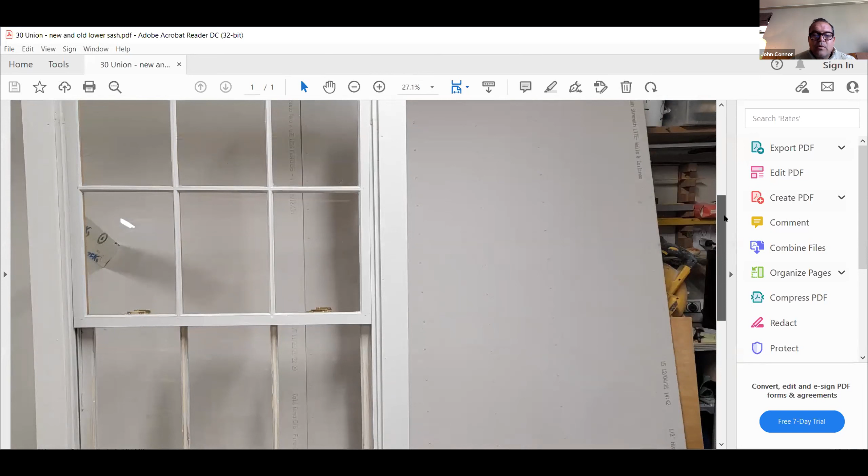You'll see the windows that I purchased, and I've actually built a sample. We took apart one of the entire windows, kept the profile of the frame, kept the upper sash, but to gain 6 more inches so we get them longer. The windows we replaced were 69. The opening was 76. So what we did is custom make. My guys in Long Island made an elongated lower sash by 6 inches.

So you'll see in the photo that's on the screen right now, the one from Brosco on the right that was poorly painted. Took that out and then exactly copied all of the detailing with just a longer sash by 6 more inches, meaning that each pane of glass is approximately 3 inches longer than before. There's also a rendering, Victoria, if you scroll a bit further down or click next.

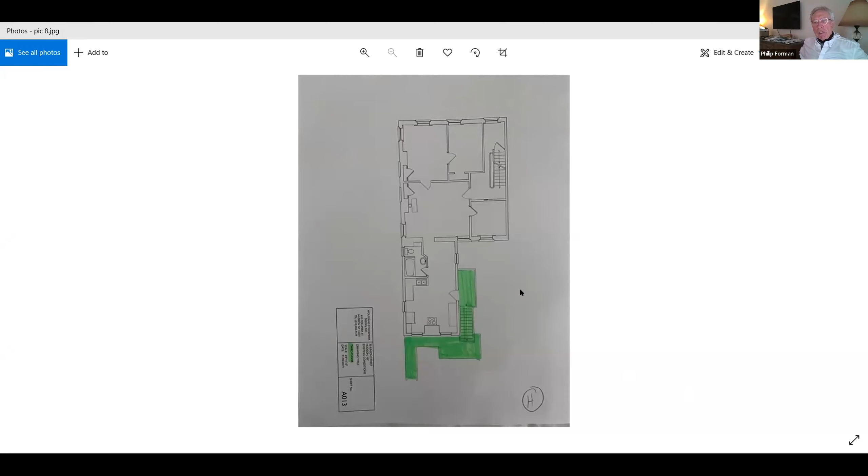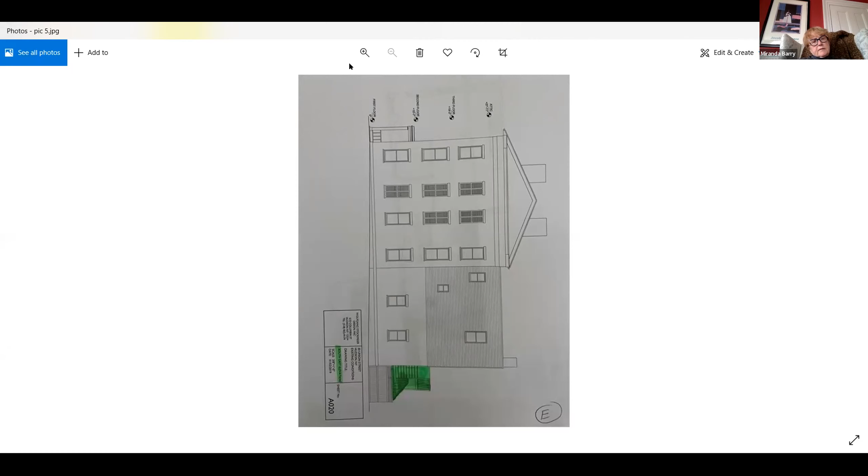And could we take a look at the new egress structure, John? It's in plan for what was there in '18. It's highlighted in the green; there's I think two or three renderings from the architect that show it. Yeah, that's the side view. Can we rotate the image possibly? It's at the top there. I'm not understanding what the egress structure is. It was a composite wood, I try not to use the word fire escape, but an egress structure. That's on the back of the house?

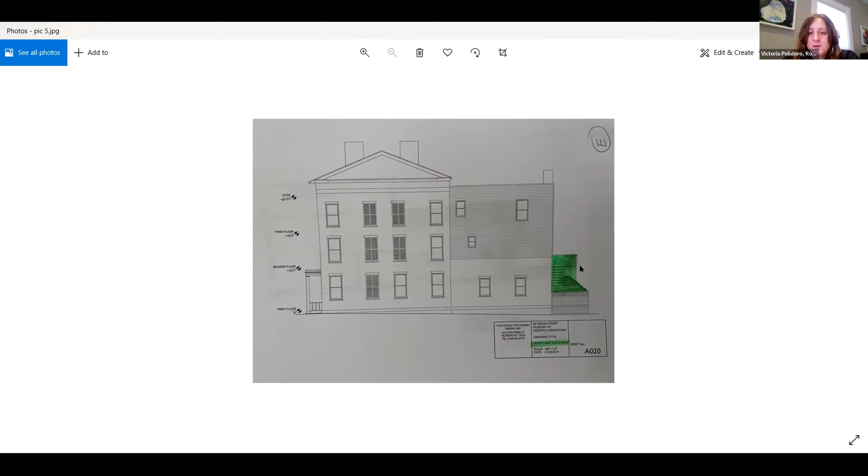These are three floor-through units, so it's to get an additional egress from unit 3 and unit 2. Okay, so that's a safety issue, to code and whatnot, but it's to replace, yes. But we can't see what it looks like. Can we blow it up a little bit? John, did you have pictures or renderings? No, I have this as-built from the architect, which I just highlighted in green. You mean it's built already? It was built, but it fell off the back of the building. So this was the as-built, and it was taken off because it was a hazard.

Is this a replacement in kind? Yes, thank you. And what is it made of? Instead of the chemically treated wood, it'll be done in wood as well, but in the more environmentally sensitive, I'm sorry, I'm forgetting the terminology. Not pressure treated? It's pressure treated, but not that green copper arsenic one. The more toxic one, I'm not using that one, obviously. Okay.

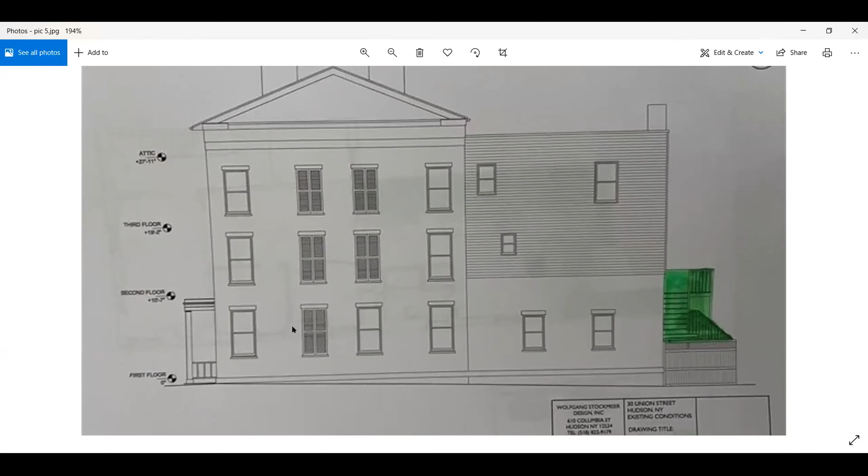But we don't have any details to show what this is going to look like. Well, question for Craig, did you determine this was a replacement in kind? Is this part of the C of A application? It's part of the C of A application. I don't know if it's a replacement in like or in kind. I know they took off the old one and replaced it with a newer structure, which is now compliant, but we do need a detail of the material. It hasn't been built. The platform has not been built to date.

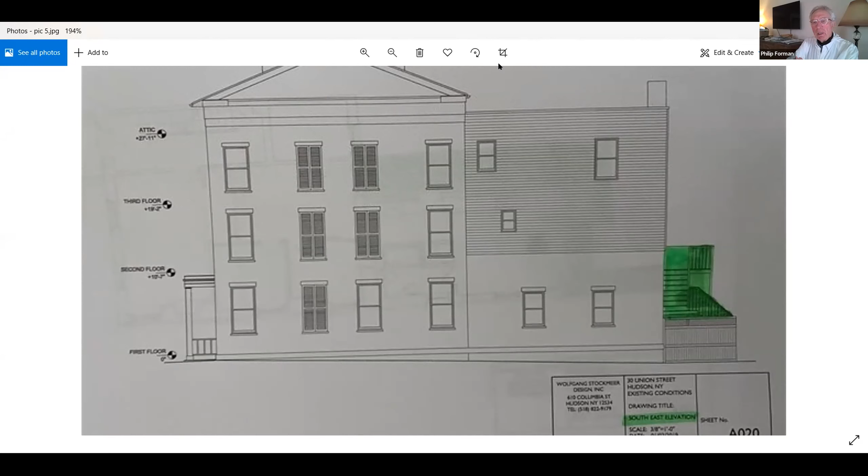Okay, so what was there is no longer there. We don't even know what was there. So in order to provide proof of like for like, we need to know what was there first before it's removed. Right. They gotta give us a detail of what is going back there, the material, the size, the construction, how wide the balusters are. John, we're gonna need to take the egress structure off at this time, that's fine, and have you come back with more detail. Great. Sorry about that.

Do you have any pictures of what it looked like before you took it down? I do. I think that would be important to determine whether it's like for like or not. Bring that with you. Miranda, I'm asking for another application on this, stripping away the egress structure. From what I can remember, it was an old rotted wood structure back there, in an unsafe condition. So I think they're replacing it with wood, but the whole design of the egress system is going to be different than what was there. So the design, the material, everything comes into play as a new structure being built onto the exterior.

Okay, John, as you know, if it was a true like for like, that would not necessarily go to the commission. You should work with Craig as you put together your plans for the egress. I'll do that. Thank you very much. I think our motion still stands on the application, but it is about the windows and the cladding being removed. We already declared that complete. Let me just ask, excuse me, Phil, but Paul, did you have some comment to make? I thought I heard you start to make a comment.

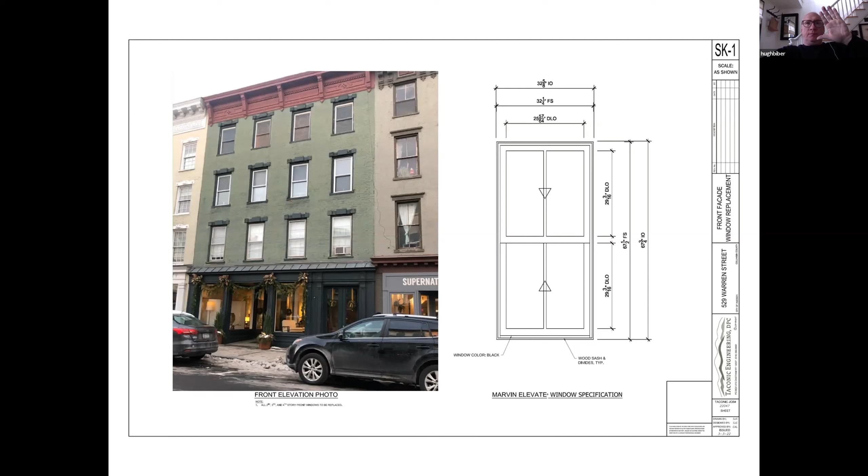Aye. Motion to waive a public hearing and request the city attorney prepare a C of A. I'll make that motion, thank you Paul. Jeremy, second. All in favor? Aye, aye. Any opposed? None. Approved, we go forward.

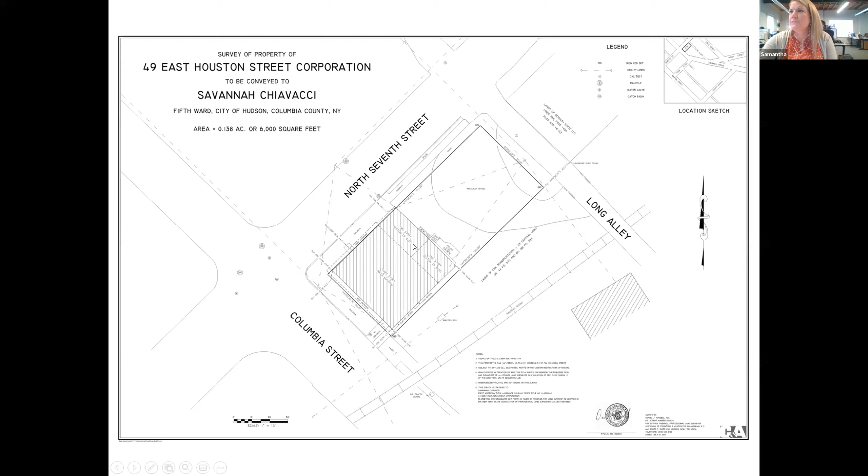So this is the survey and existing condition of the building at Columbia, on the corner of Columbia Street and North 7th Street. It's currently vacant and in the past has been used for business use and residential. The front portion is a 3-story brick building, and in the rear half is 2-story brick and a 1-story building.

So the owner proposes 2 retail spaces and a space that could potentially be used for a restaurant, and then the 2nd and 3rd floor as residential.

So the owner is proposing to extend that 2nd floor brick portion in the rear across the entire building, and then adding a 1-story addition to the back with a prefab metal staircase and a fenced-in courtyard.

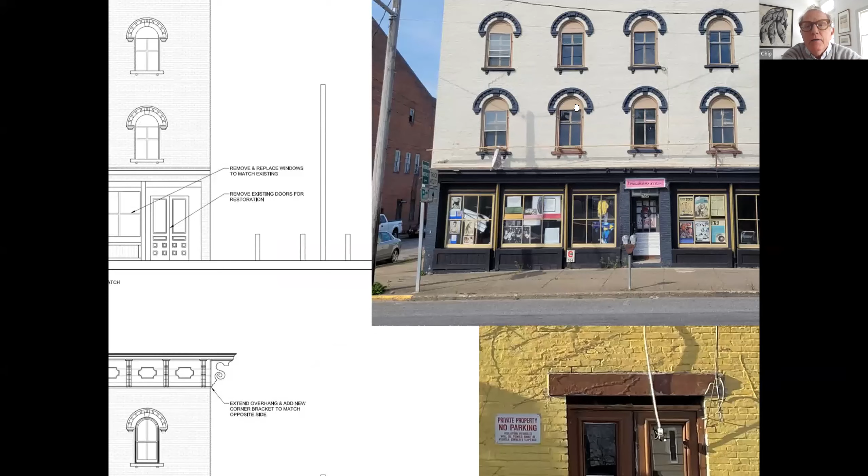Could you show an exterior view of those windows again for the commission? Do you have a zoomed-in detailed photograph of that? Yeah, if you zoom in, that's great. Going a little further. Unfortunately, that's as far as I can zoom in, but I can certainly send you a closer up photo.

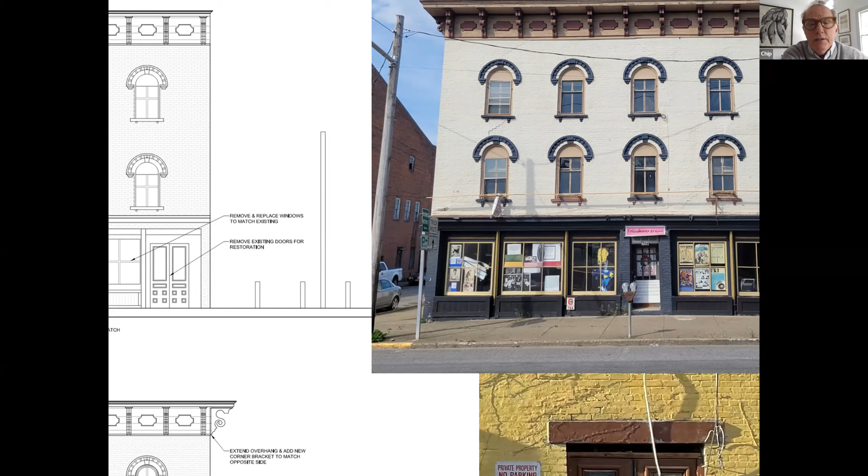For the commission, the arches of these upper story windows are very interesting—elaborately detailed corbelled brick that forms the arch shape. It's quite a handsome building, and there's a lot of original material that's quite attractive. In this photograph we can see, to Paul's point, that many of these original sash are in fact in place, obviously in need of repair and restoration.

And just to elaborate on that, Chip, Samantha and Kylie—if there was a way those windows could be further evaluated to see if they could be restored instead of replaced, I think that would be a great idea. Okay, we can look into that.

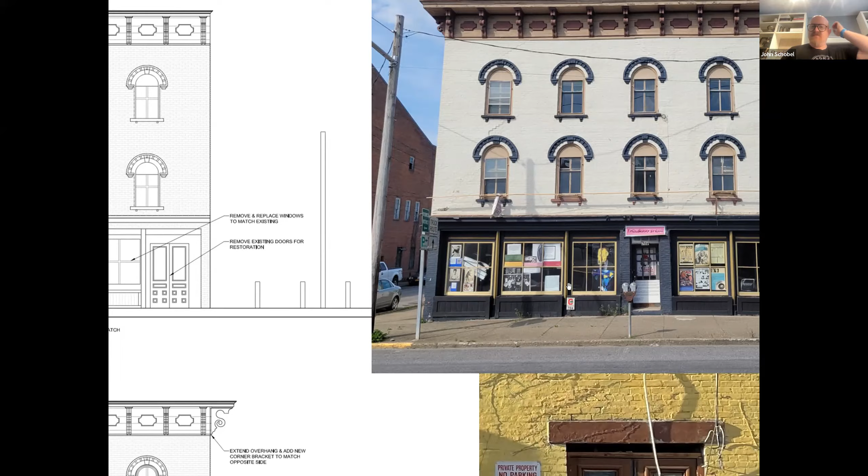Does the commission have any opinion on the door, the new door that seems to be the most radical change proposed? I think it would be interesting to know—the storefront that's there is clearly not original to this building, and the replacement infill sash that are there, I think, are not original either.

Can you zoom in on that storefront as you had before? There are these fluted iron columns that are painted yellow here. And certainly the planters should be removed. The condition of that storefront is super questionable—it's been really beat up.

I don't doubt there was originally some different type of door and window configuration for the storefront. It'd be super useful if we had an early photograph that might reveal this configuration. My personal opinion is that the existing storefront is not original and probably not really worth restoring. So you suggest you would replace in kind the storefront windows?

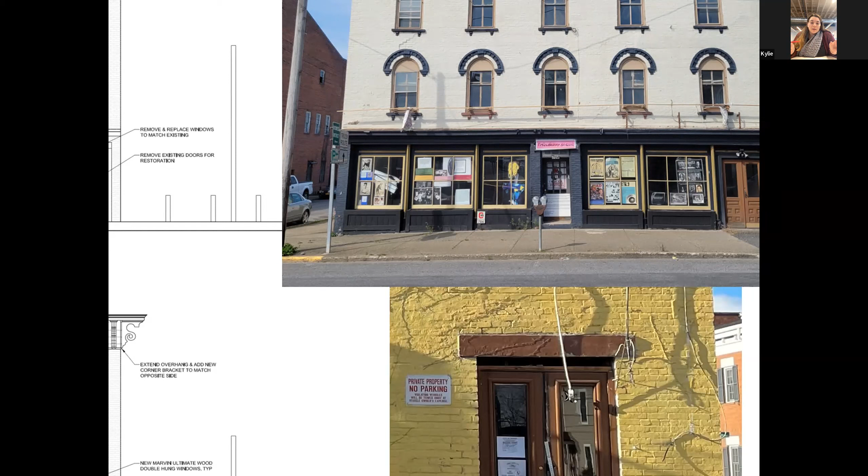We do have some information regarding that. Those brick piers in the center that are on either side of that door, we believe those are original. Same with the brick piers on the edges. So the inset that you see, which is in front of the existing storefront windows, in all of the historical images that we have, that also appears to be original. But you are correct when you said that the configuration that exists now for those storefront windows is probably not original. That door on the right-hand side is probably original, but the rest of the windows and the doors may not be. There are multiple representations that have conflicting information.

And do you believe that the fluted cast iron steel columns, that those are original to the construction? Yes, because they seem to support those large masonry openings that are cut in so that you can see that inset. Do you have historic photographs that show some of the original storefront? I have them. Give me 1 second. Maybe it would be best to bring them back at another time because I have to find them and pull them up. We can gather them up and submit.

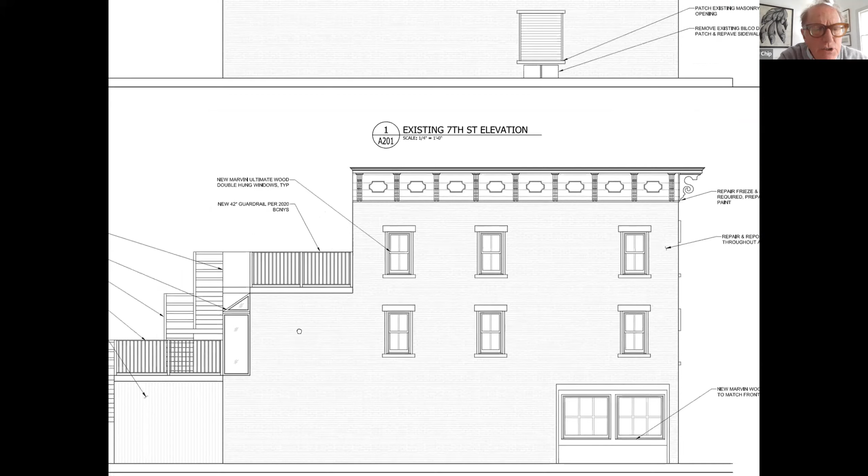And Kylie? The sloped roof, yes, there is sloped glass on top of there. I see. Would you zoom in to that so the commission can see that? There we go. Right, so put your cursor on the sloped glass that's there. That sloped glass is going across the back of the building. If you could now show the commission the rear elevation. So that's the sloped glass coming across there. Yes. Thanks for pointing that out, Chip. I couldn't deduce it from that 2D rendering.

Yeah, so it's also a little hard to understand exactly. If you were to put your cursor in between those two pieces of greenhouse glass where you have stairs, that wall right there, hold it right there. That wall plane that you're showing right there is essentially the background, behind the sloped glazing of the greenhouse. Correct? No.

So the sloped glazing starts at the existing brick and then is cut into the building behind 3 feet. So those windows would be installed in the existing plane, and then you'd be cutting out 3 feet so that you could get that sloped plane in there. I understand that. So take your cursor and zoom into the sloped glazing, if you would. You see the sloped glazing and you're indicating the triangular piece of glass, right? Then there's a triangular piece above that that finishes out that rectangle. What is that material?

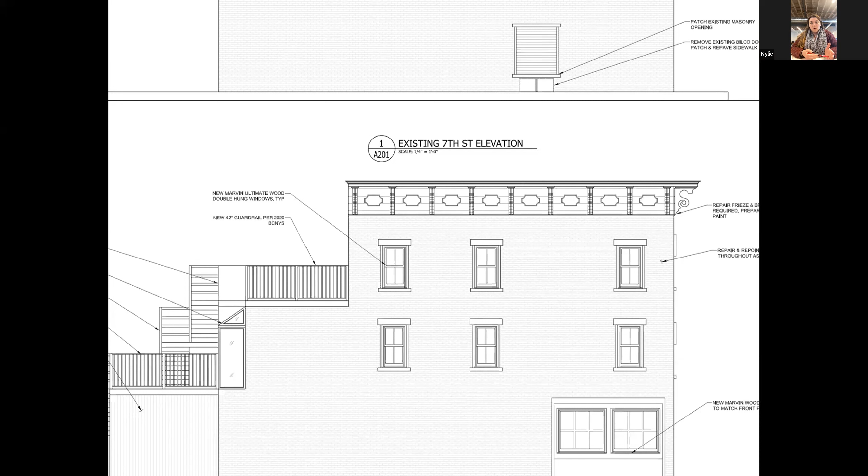Can you show us the rear elevation again? I think Chip is thinking that the windows go all the way across, but I think there's a section in the center where the stairs are that does not have those windows. Correct. Yeah, and so my question is that the plane of the wall, move your cursor a little bit to the left of those, right there, that wall plane is back at the top of the sloped glazing. Correct?

It's my understanding that this wall here and the brick wall is still the existing brick wall. Well, if that's the case, then your slope glazing isn't going back, it doesn't make any sense. Your slope, you cut it out on the side, but you haven't cut it out on the back.

Yeah, my understanding from what you said earlier is that it's 3 feet in and that you have these two planes. Where the brick is in this rendering is 3 feet back from where it is today. That 3 feet forward is where you have the glazing. And then you're gonna have some kind of turn or corner, which I think is what you're talking about, Chip, where the windows end and the wall continues.

Yeah. I mean, the bottom line is that I think you kind of have an Escher drawing here that doesn't really work in 3D. You've got a side elevation that doesn't really work volumetrically with the rear elevation. So I think the whole issue of the slope glazing is an integral part of your proposal here, and it's rather hard to understand what it really means.

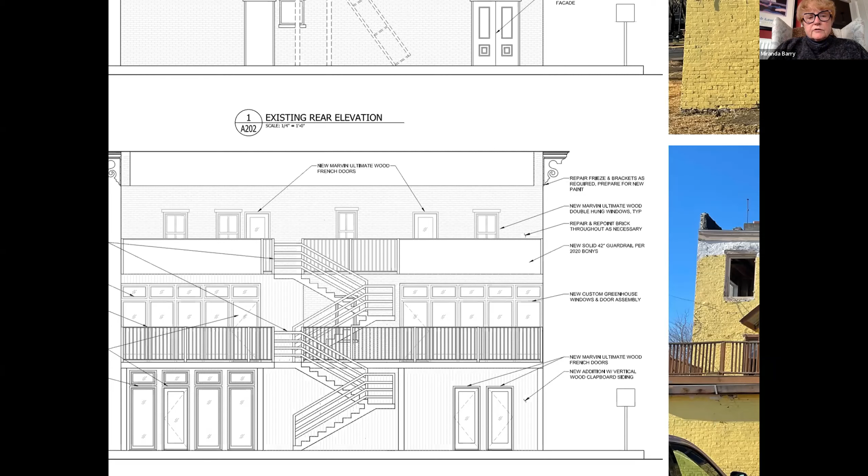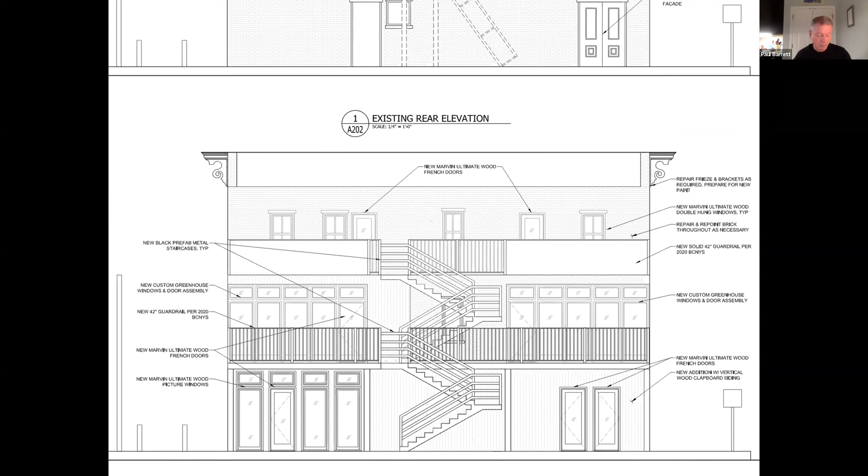Yeah, the question is, looking at the greenhouse windows that are shown on this elevation, the transoms across the top of the windows, are they flush with the brick wall, or do they have a sloped top that sticks out 3 feet? Or 2 feet or 1 foot? Nothing sticks out. Let me go to the side. Yeah, see what Chip is pointing out. There you go.

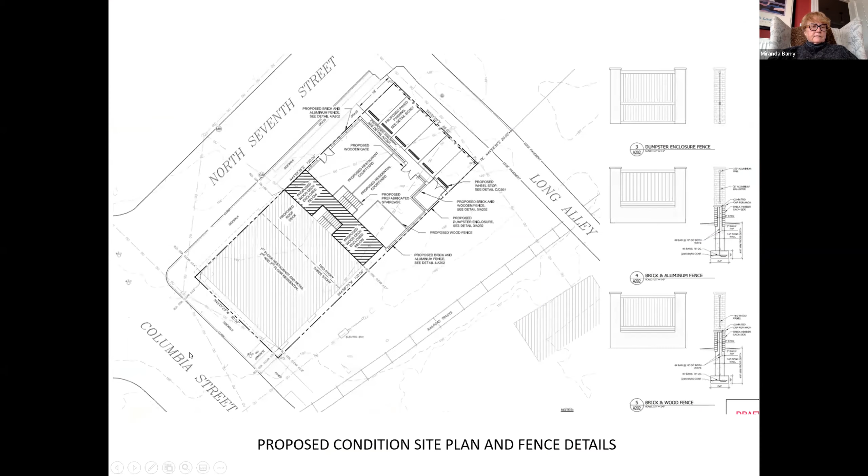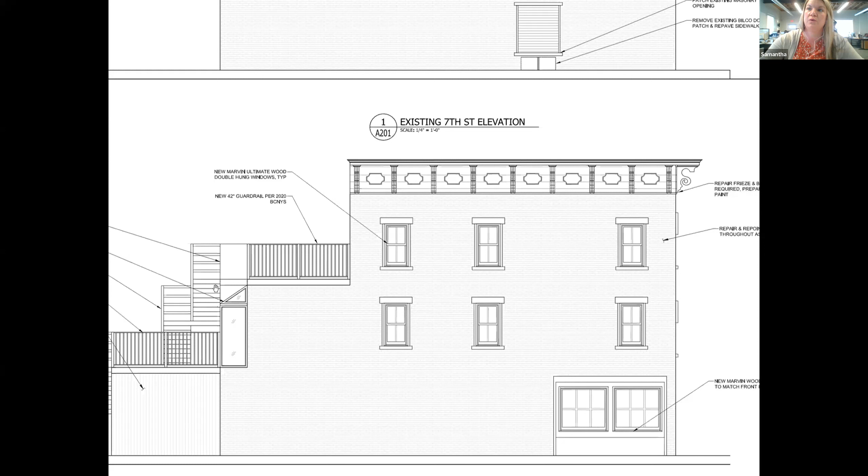So here you're saying you're taking 3 feet out of the existing wall. Right, so this is the existing up here, it goes all the way down and it's in line with the existing, so the existing rear wall is remaining, except for the portion where the greenhouse windows and doors are, where it would be set in. It's also not clear what's landing on top of all this, how that's working, but that's a separate question.

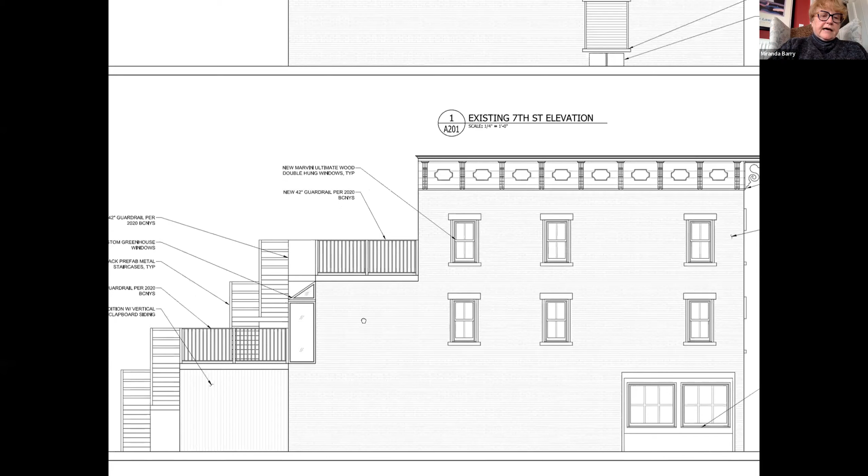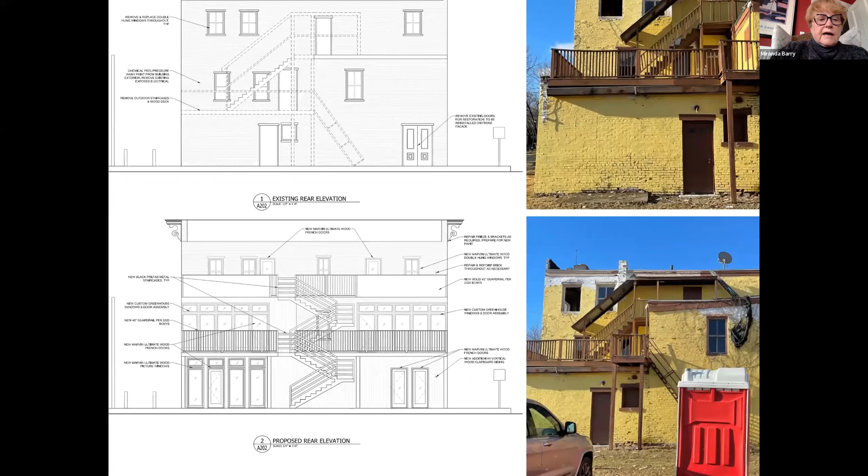So if we imagine this triangle, you're saying that on the rear elevation, the triangle goes all the way across until the center section where the brick is remaining at the same plane that it is now. So right above where your cursor is right now, on that window that's closest to the wall, there's going to be a slanted plane coming out, and the bottom windows, the large windows, are flush with the brick.

Is that right? Yes. So there's a tilted, and then what about above those windows? Is that at the plane of the existing wall? So the whole slant is underneath the existing wall, or what is that? Kylie, do you know that question? Sorry, can you repeat that?

So looking at the horizontal plane above the greenhouse windows, that section there, is that flush with the existing brick wall? And if so, then it would mean that the slanted top of the greenhouse windows are underneath a shelf of brick, which doesn't make any sense. Otherwise, the windows have to be sticking out beyond the brick.

So the slanted part is recessed with the deck that's above. The deck is made of wood. It's not very clear on this drawing because it looks like it would be brick. It looks like it's the same material as the center section where the stairs are. Right. And I wonder what you get from that slant if it's underneath the deck. There really isn't any light that's going to come in there.

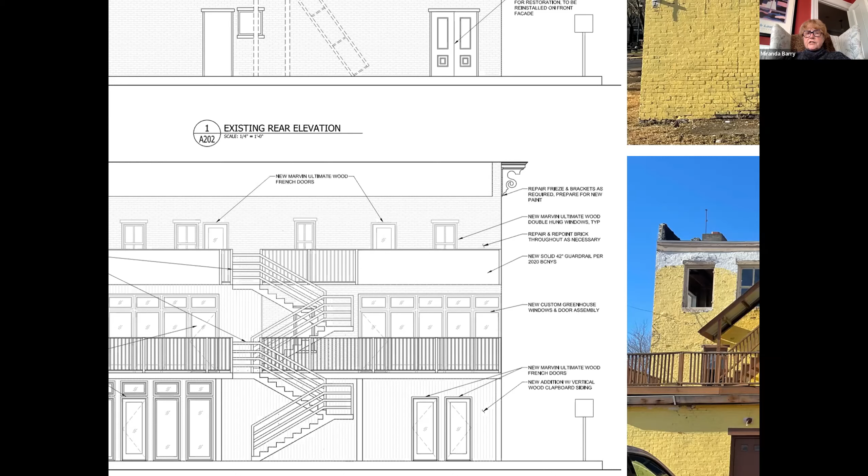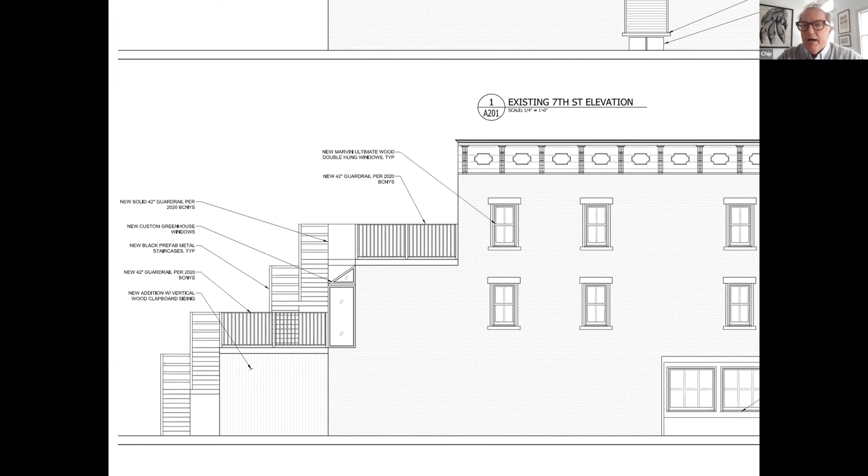Sounds like we may need some more sections or some more clarity here before, is that accurate? Mhm. So what you're saying, I agree. Yeah, I think we need to have more clarity here before we really evaluate this. Okay. Do we want to break up some of the pieces? Because there are a couple different themes we've been talking about, everything from the back to the windows to the door. Do we need to kind of systematically go through them, or?

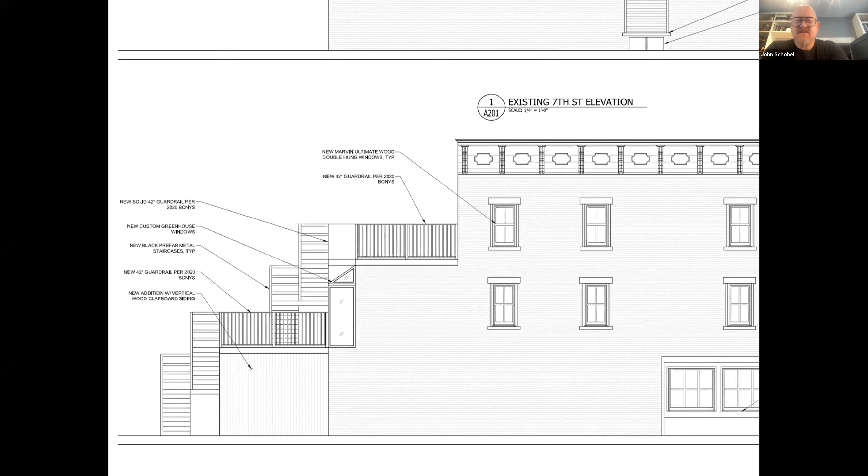But also, I'm a broken record in this. The front, it seems to me, once we see the historical photos, determine what historical elements are there and what is being retained or modified, that seems pretty standard for us. And the back, although the existing back is hardly a thing of beauty to behold, I would say that the proposed modifications are pretty significant. And even though I think they're ultimately, once we deduce what they actually are, going to appear to be beneficial, it's a pretty big and pretty public change.

And I wonder if we ought not have a public hearing at some point. So I just want the applicant to be aware that at least that would be something that I would advocate for, once we deduce what it is, because it's going to be very, very visible from all parts of the surrounding area. I agree with that sentiment, John.

I do want to say one other thing about the storefront. In this image that we're looking at right now, the proposal to bring the storefront around the side, we can really see how inappropriate the existing storefront is to the original architecture of this building. And I think that if there is to be thought about bringing the storefront around the corner, it really needs to be fully understood in light of what it looks like three-dimensionally and what the original storefront is. It's clear that the original storefront probably never turned the corner. So that's just a fact.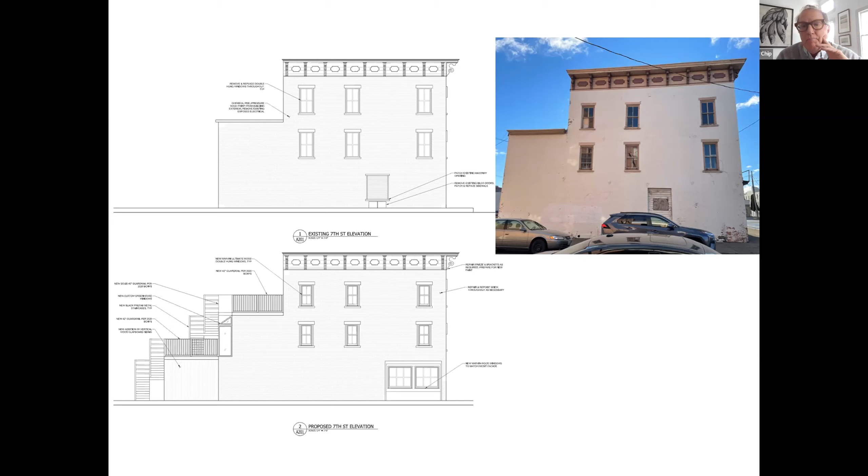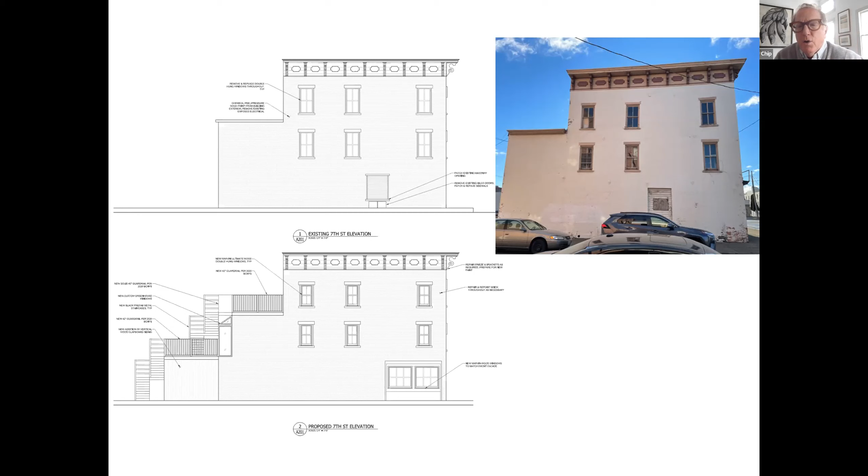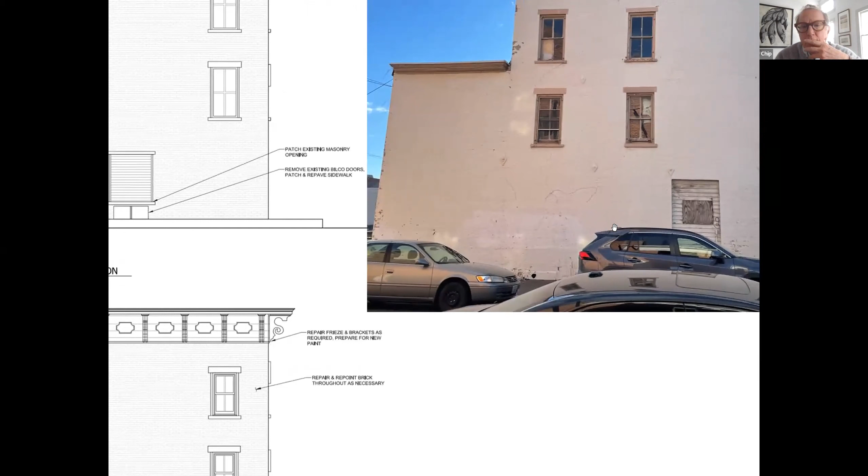The large opening on the first floor that we see in the photograph here appears as though it may be an original opening. I don't recall quite what the lintel condition is on that opening, but that may have been a service door or an opening of some nature. I don't really know, but I think it would be useful for the commission if the applicant would do a little research on that opening. Again, historic photographs would be super helpful.

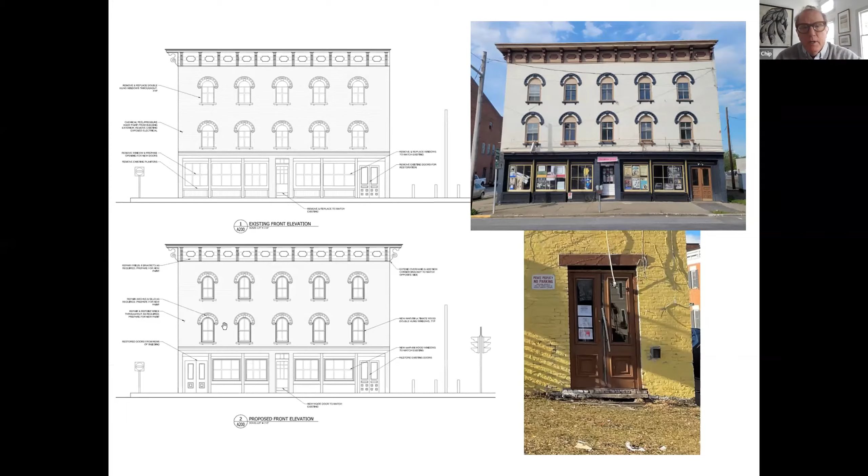And if the applicant intends to bring the storefront around the corner, it really needs to be thoughtfully detailed. The existing brick pier, if you scroll back for a second so that we can look at the proposed storefront, yeah, the brick pier on the left-hand side of the storefront is a kind of a pier, but it's not really a pier or a column. It is an extension. It is part of the side wall. So if the proposal is to cut a storefront in the side, then that side wall brick becomes a pier and not a wall.

And this storefront that we're looking at right now is very well bracketed on the left-hand side and the right-hand side by the existing brick side walls. So when you return with more details, I think this storefront really needs to be heavily considered, with a more thorough explanation of how you're actually going to detail it if you wish to take it around the corner.

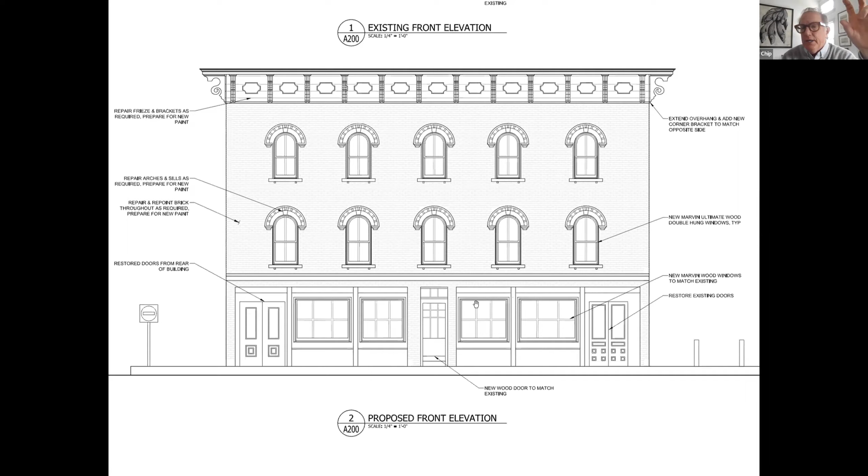Also, as we're looking at this photograph, you're proposing to extend the bracketed cornice on the right-hand side, which of course in this image does balance out this elevation. What is not indicated in the application is whether that bracketed cornice is intended to extend all the way back, or is it just the corner? On 7th Street, it extends the length of the 3-story building. We don't really know what you're proposing. There you go, yeah, there. The last elevation, yeah. You see how the parapet of the roof steps. So I see here, you're proposing that cornice return basically 2 bays. Yeah.

And then on this elevation, similar to the other elevations, we are proposing to replace the windows with double hung windows. Mhm. And then the addition from the side. And then repoint and repair brick as needed. Mhm.

Samantha, this was a lot to absorb and a lot of feedback. And I'm just trying to think what we have from time to time, not in a long while, been able to do, a quote unquote workshop to go through some of this stuff. This is a ton of feedback and a number of interesting challenges on what obviously you, the owner, and we want to be a beautiful restoration, and also provide the functionality that you want.

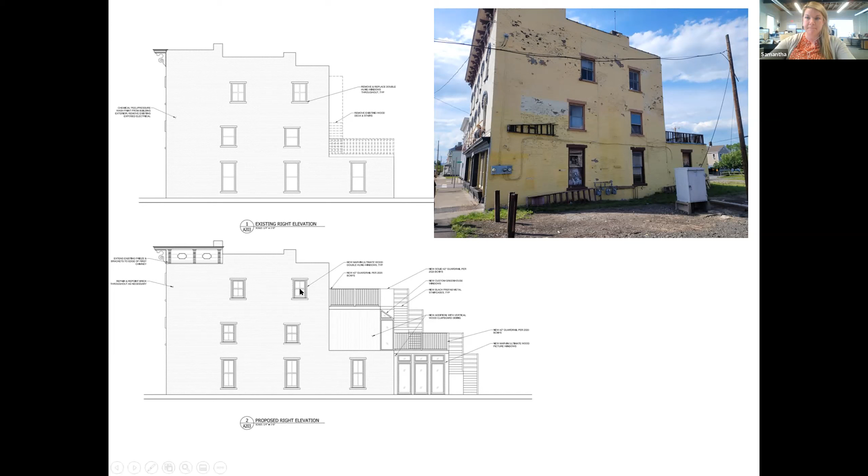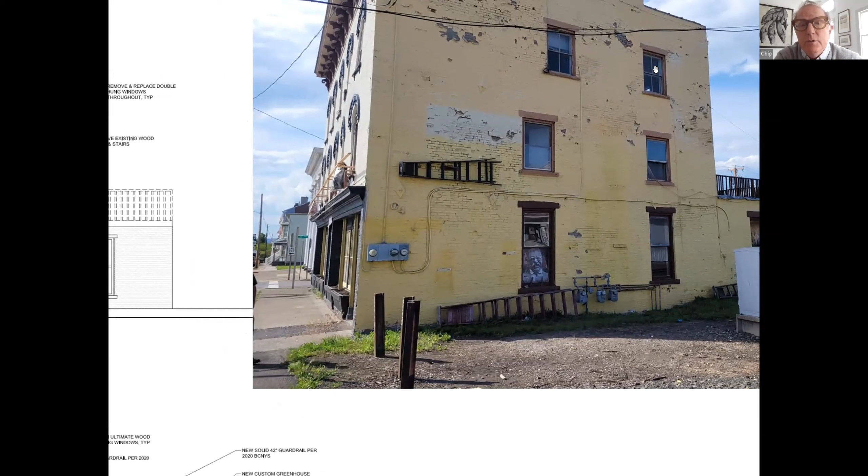Just to clarify, you want or would like to see even the side windows restored rather than replaced? In the view where we're looking at these windows on the side, it does look as if the second and third floor windows appear to be 2/2, and maybe original. I think the third floor is 2/2. Are they original?

I'm not sure. We wouldn't ask for restoration of something that was subsequent and not likely to be original. But if those top floors are original and in a condition where they could be restored rather than replaced, that would be great.

I think you'd have to inspect them a little more. If you go to the 7th Street elevation photograph, to see what those are - those are definitely windows that I think the commission would be interested to see restored, because they're such an integral part of the building.

We can certainly look into that. Great, thank you. No problem. Okay, thank you very much. Thank you so much for all your input.

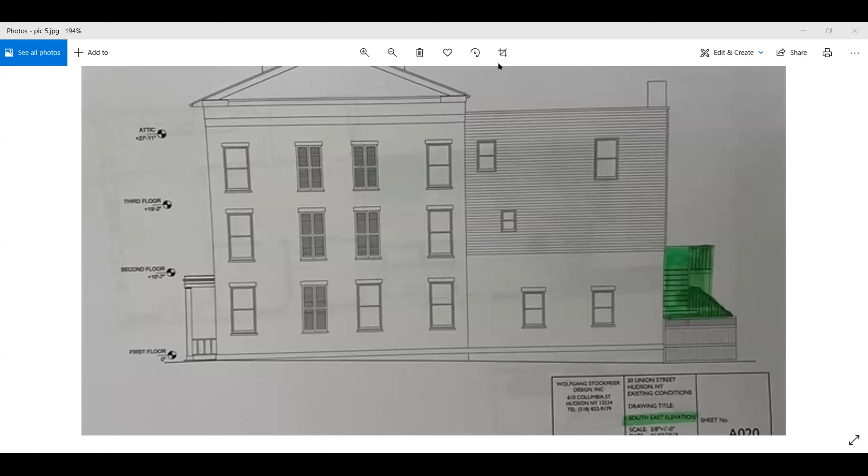Good morning, everyone. Morning - can you hear me? It's breaking up a bit. If you turn your camera off it may help with your bandwidth. Someone has their audio on as well - does that help? We can see your shared screen or someone's shared screen. That's better, DeForest, but do you have a phone on as well as your computer? That may be causing the echo. You may have your volume up really high - could you turn it down a little please? Better, okay, thank you.

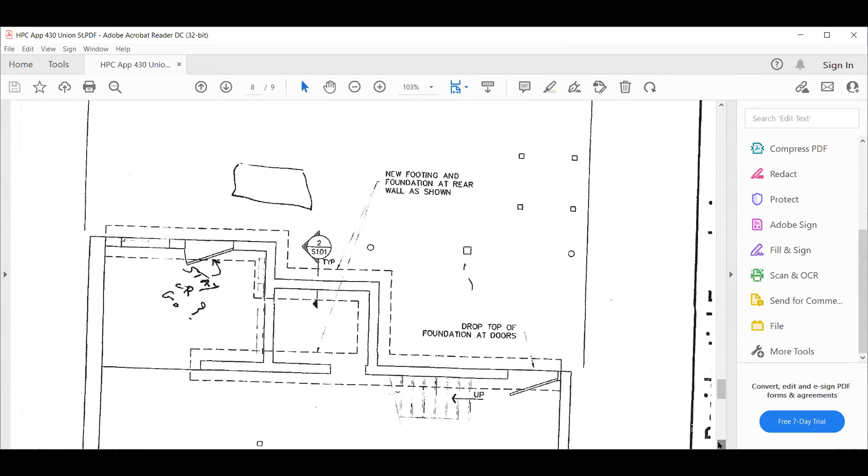Do you want to proceed? Go ahead, DeForest. The homeowner wants to, if you have the photographs, remove the door at the rear of the building because he's putting in a new foundation and the door is no longer required - that door right there. Is that the entire scope, DeForest? That is the entire scope for the historical preservation. What will it be replaced with? Vinyl siding to replicate what's there. Okay, we're just eliminating the door and putting back vinyl siding over that opening.

That seems pretty straight up and clear. Commissioners, any questions? I have no question. I'll make a motion to find the application complete. I'll make that motion. Second. All in favor? Aye. Any opposed? Passed.

Motion to waive a public hearing, request the city attorney prepare a Certificate of Appropriateness for the removal of the door we looked at and vinyl siding. I'll make that motion. Second. All in favor? Aye. Any opposed? None. Approved. Thank you.

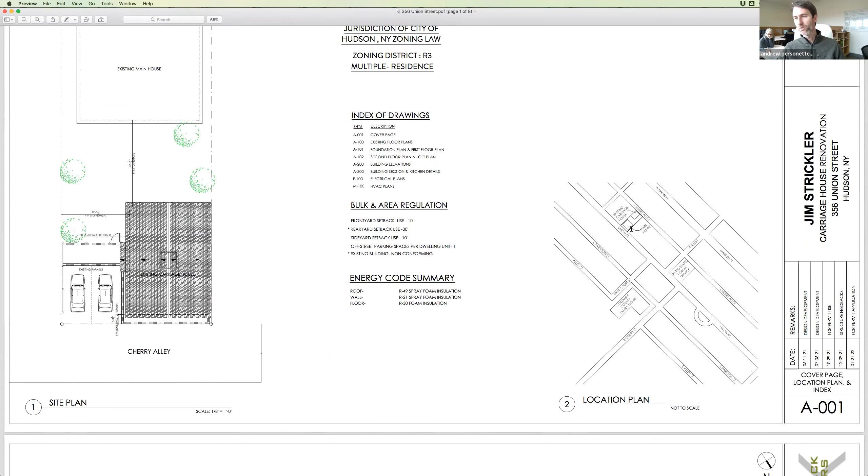356 Union Street, the main house in the front was bought by Galvin years ago and renovated. The carriage house that is on Cherry Alley and on the property line had the interior demolished by Galvin a little over a year ago. So it has not been in use, but our existing first floor and second floor plans basically just show empty spaces. Prior to that, the building had been used as a residence, or it was 2 apartments. So the intention is to bring it back to being 2 apartments.

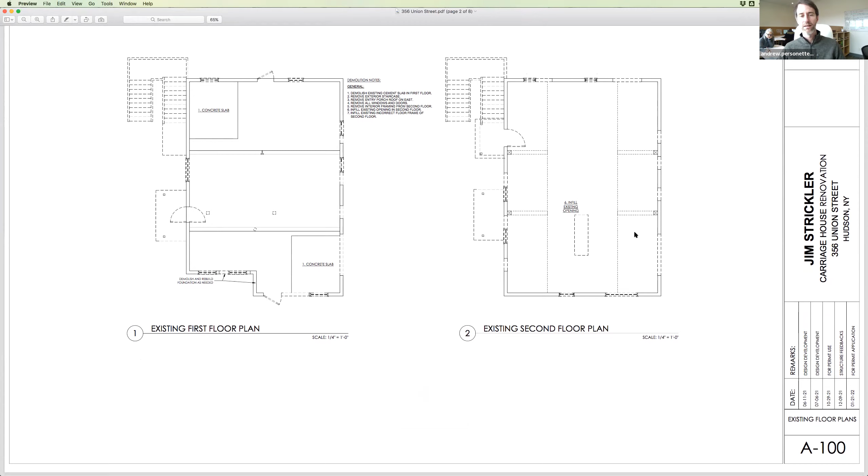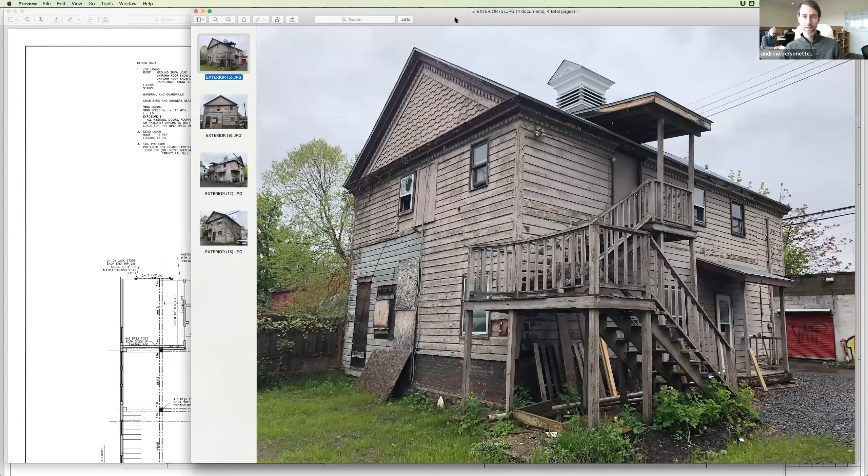The existing building has an exterior access for the second floor. We will be removing that exterior access. It also has, obviously, a later addition of a covered porch for the first floor access. We'll be removing that as well.

Our intention is to make interior access for the second floor. It will be accessed from the side of the building and through an interior staircase. And then for the first floor, we will be creating an access in this little cutout from the building.

Other things we're intending to do is put a post under this cantilevered corner of the building. Structurally, it's insufficient the way it is right now. And we'll be creating a small patio there. I'll flip to the drawings in a second to show you where that is.

But the other intention for the outside is to replace and restore the novelty siding as best as possible—it's had some patchwork. And then we're doing completely new window and door fenestration where we're not really reusing the exterior locations. These are like a totally random patchwork of old windows. The only thing we are holding onto is the location of the exterior second floor hayloft door, that is going to get replaced with windows in that same location and then mirrored on the other side.

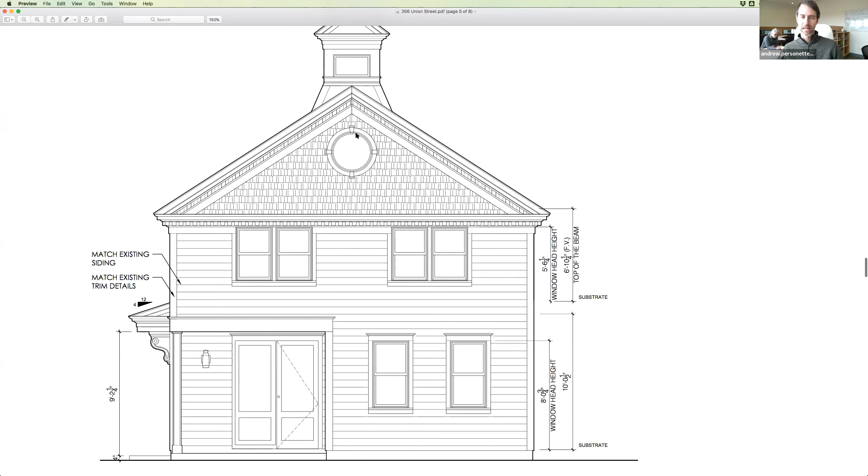We are adding the circular windows in what will be a loft space on the inside. And then the cupola at the top, we are replacing the vents. The venting that you see here, we're keeping the structure and the framing and just inserting clerestory windows at the top to bring light into the center of that space.

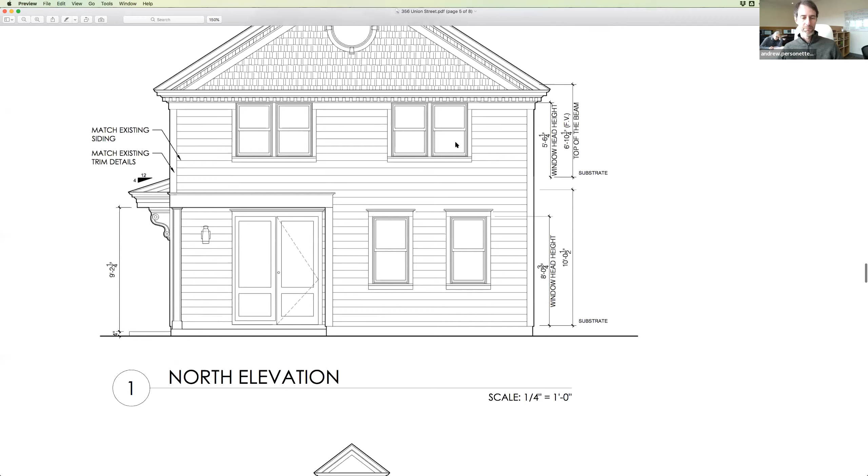Other elevations—all of the windows are intended to be double hung windows. We are proposing Marvin Elevate. My understanding is that the only option for the exterior of Marvin Elevate is fiberglass clad. We would like to do fiberglass clad. There are no existing wood windows on the building, and that is what we're proposing.

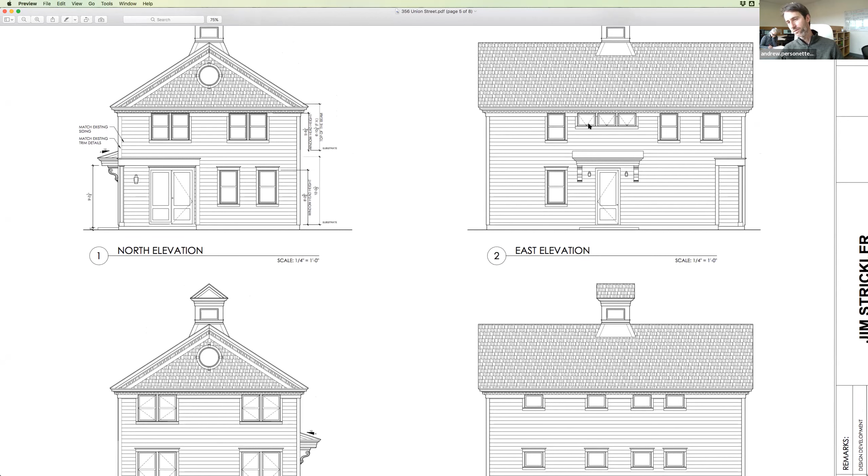The only windows that will be inconsistent with that is on this east elevation—we do have some clerestory windows that would be single panes, similar proportion to the other windows, but are awning windows. This is over the kitchen, and actually, I think that's in the living room on that side. In the south elevation, the south is actually the rear of the building from Cherry Alley.

It's facing toward the back of the house on Union Street. For egress purposes, we would like to use casement windows. We're proposing casement windows with a heavy check rail so it will look consistent with the double hung windows visible from the Cherry Alley side, but will allow egress from the upstairs and downstairs bedrooms.

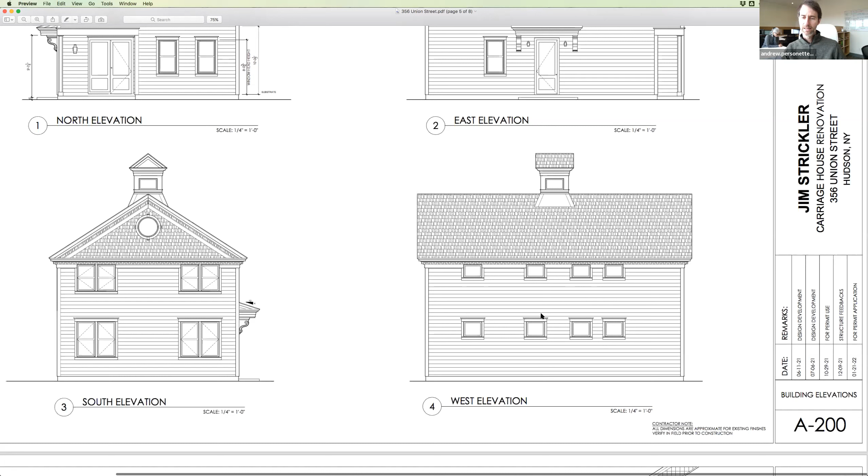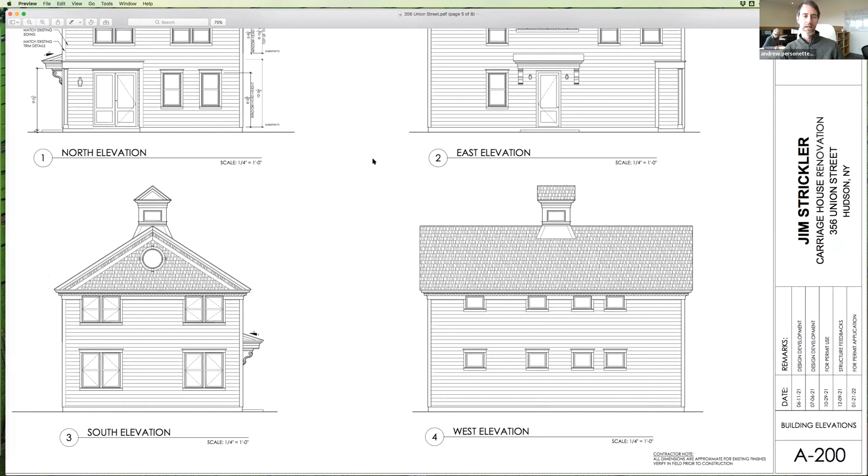The other inconsistency on the windows is that on the west elevation, the building is on the property line, so we need to give a fire rating to the entire west facade to meet fire code. These are fire rated windows, metal clad, all fixed windows, located in bathrooms and kitchens, so they're all at a different proportion, but a proportion in keeping with the existing windows on that facade.

So currently there's just these two windows on the facade, the west facade.

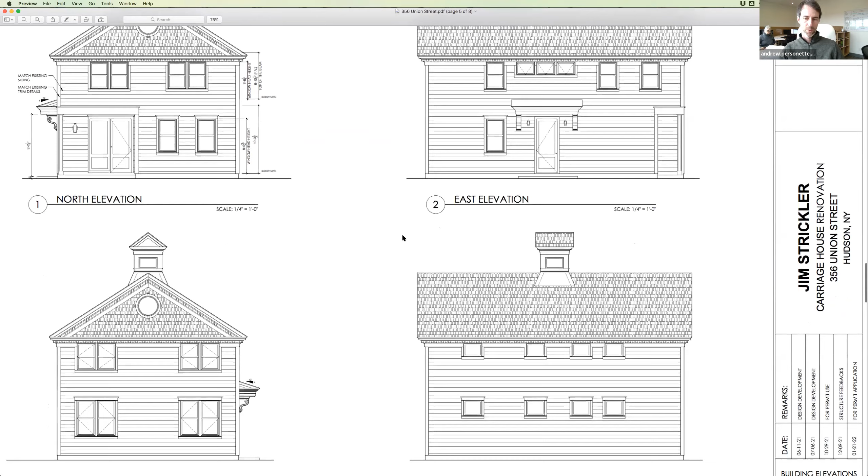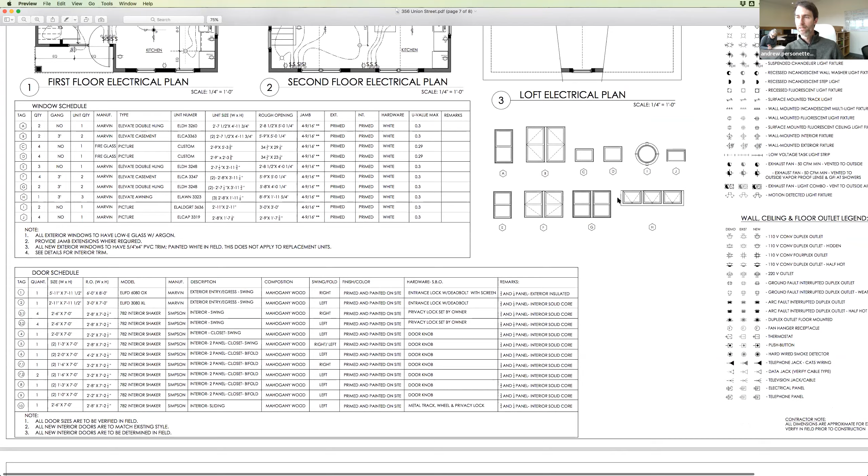Let me see if there's anything else. I think that's the main points of the project. We do have interior plans in the set, and we do have a window and door schedule. The two exterior doors are also Marvin Elevate fiberglass clad doors. So I'd be happy to take any questions.

Thanks very much, Andrew. Andrew, do you think that cupola is original?

I can't tell, it looks like it's been slapped on, and I just don't know if you knew any of the history of it. I don't, we don't have any historic photographs of the building, so I don't know if it's original or not. It did actually have very similar proportions. It's kind of hard to see with the shadows in the eaves, but the trims at the top are similar proportions, and there's a similar exposure on the fascia under that. So whether it was original or added on, I can't say for sure, but it does have things that make me think it could be from the period.

The other thing is that this probably was a true carriage house, based on configurations with the overhang and the framing we see inside, which shows there may have been actual carriage doors. The engineer also mentioned something about the framing and the way it was framed inside, that you could pull a carriage in, turn it around, and bring it back out. So quite possibly this was a hay loft, with a door that brought in hay to the upstairs, in which case they would have wanted good ventilation to prevent overheating and fire in the hay loft. From the inside, the framing had the same style, patina, and type of wood, so I believe there's a good chance it is original, but it is a little curious.

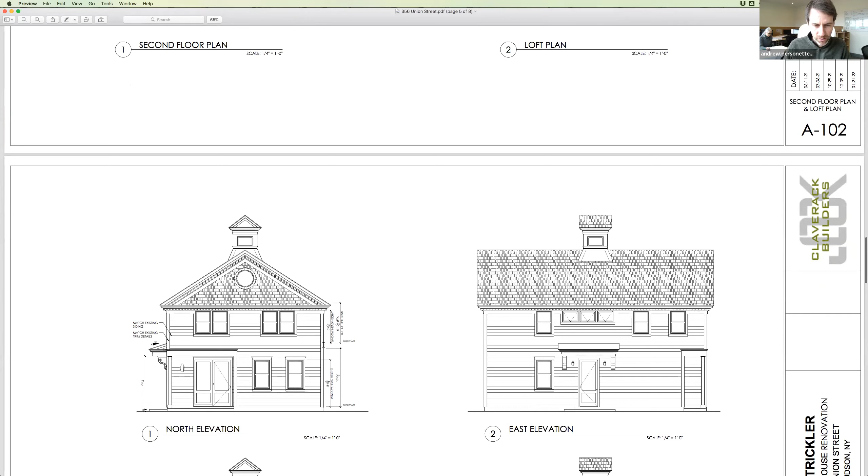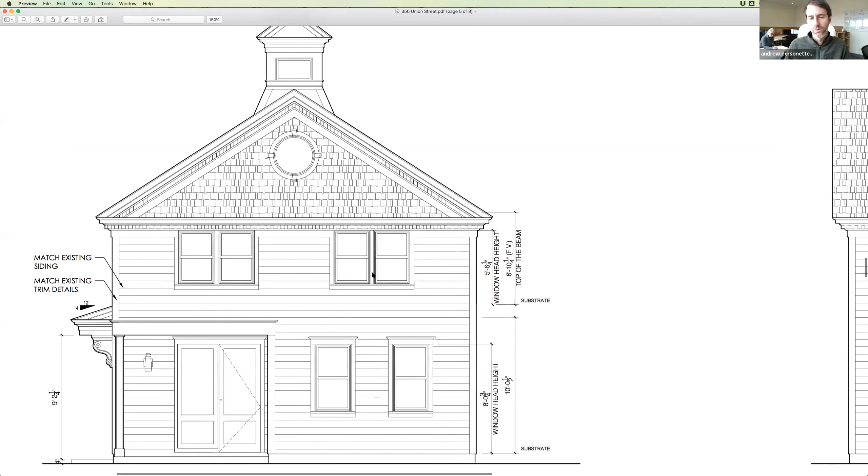I would agree with you. My only challenge is that even going up into it, the way we have it, we only have a 5'6" head height at the window. So we're just above 5 feet for where you can see out. The proportions of the building are very large on the lower floor and very squat on the upper floor. Yeah. That was part of us wanting to remove this exterior door. This one actually cut all the way up through it. Yeah. And to be able to restore and replace that dentil molding across there is super, super important. Yeah, that is our intention. We want to really clean this up.

I think the concept of getting rid of that exterior stair is really important. And I think the concept of putting a column in at the corner is perfectly legitimate. Also, the overall concept is good. Are you proposing, for the doors that are in this north elevation, removing the hayloft doors? We are removing the hayloft door. We are filling in with window here and then mirroring the window on this side. Yeah.

I think in one of the other applicants that we've had recently, the hayloft door opening has been retained, infilled with glass. And I think maybe the doors were used as shutters on the outside, or maybe it was a sliding door that was retained. I'm not recalling, but any opportunity that you might have to retain that original material, even if it's just an interior shutter, and that opening retained with the hayloft post, it's kind of nice to keep the original architectural intent of this building, as it helps to retain the imagery of the original use of this building as a carriage house.

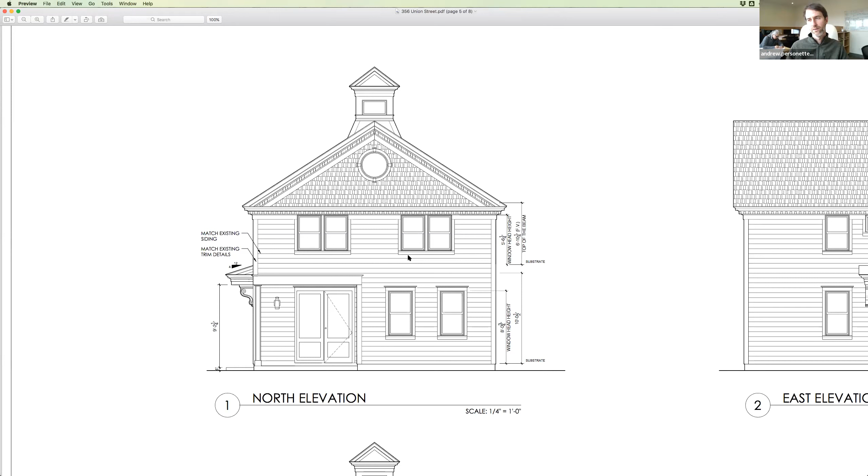Yeah, I mean, even if the glass that was inserted into that wasn't a double hung window, but was a very modern glass panel. I see. Yeah, more like a picture window or something like that. Right, and it could even still be subdivided, or a picture window as a single pane. I think that'd be kind of neat to keep that idiosyncrasy of the building. Gotcha. Okay. Or still divided in the middle the way the doors divided the opening. Yeah. We could look at that.

I would have to talk with the owners and I would have to just verify with our trim details and the heights that we need for door openings and awnings, stuff like that. Sure. I think there's a good chance that could still work in there. I think we'd probably be unlikely to want to change the head heights just because of the impacts on the rest of the windows. Yeah. We would just, I feel, lose too much light and glazing up there.

Yeah, I have to say, that hayloft door is such a salient element of this poor building that has been so chopped up and abused over the years, but it really is, I think, a significant historic detail. And if there's any way of incorporating it into the design, I think. Miranda, I was gonna say it, but I'm so overwhelmed with the quality and thoughtfulness of the design that I was gonna refrain. So I'm glad you said that.

It's just, your design is really beautiful and there are lots of changes that are completely legitimate. But that is the one piece that tells us what this building was. And it just seems a shame to lose it. If there were any other way that the owners could consider incorporating that, retaining that. I agree with Miranda. It would be a service to the town. Even if you took the window that's next to it now and made it larger so that more light would come in or something, well, I said what I meant. I've said it too. Yeah.

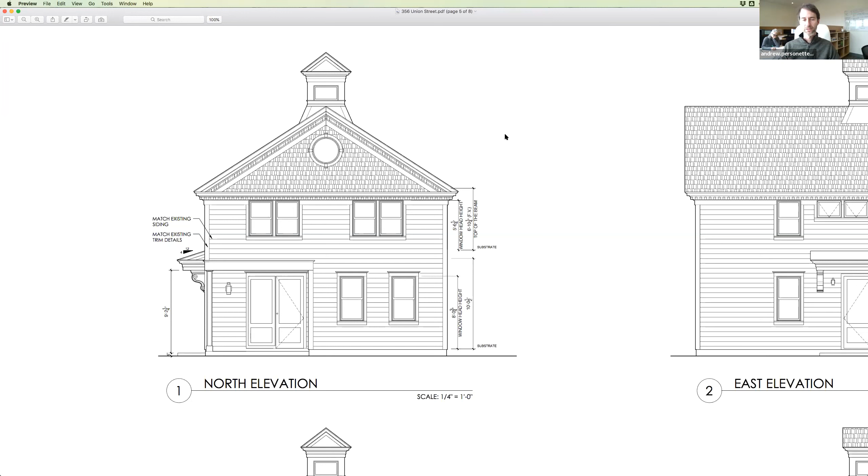Yeah, thank you very much. Thank you very much. It's really a terrific project. It's amazing. It truly is, Andrew. That's going to look fantastic. Thank you so much. Have a good one.

We are at 441 Warren Street. Who's here to speak for 441? Hi there, I'm Chris Billingham, representing the architect. Good afternoon. I'm the architect for the owners, Madeline Hung, who's also on our call here. Terrific. I have been paying attention and will share my screen in a moment, as soon as I can find it. Apologies. Oh, there it is. Everybody see what we have up? Yes.

So the owners have purchased this property and are in the midst of a renovation. They've converted it to a residential unit. The third floor space requires a second means of egress. Unfortunately, we're currently unable to get that second means of egress; there is an existing gable roof on the lower roof section, which would block the path of egress from the third floor space. Our first proposal is to remove this gable roof from this low slope roof area, which would enable a path from the third floor to an egress structure off the back of the house.

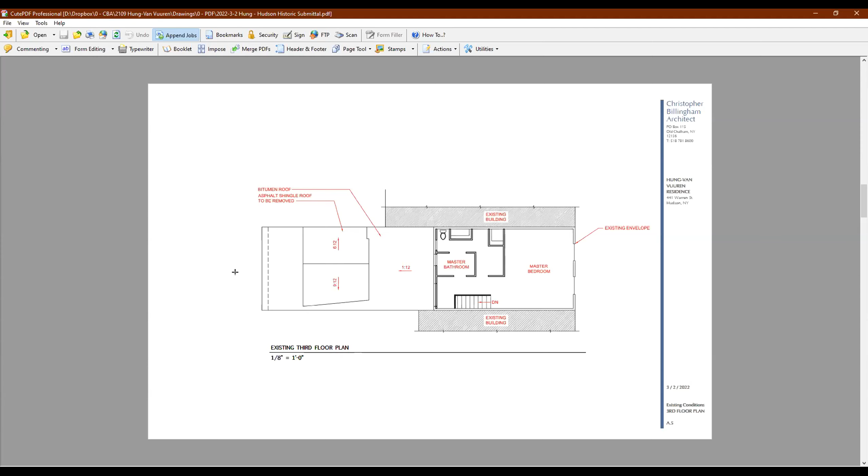But the gable and the skylights, when you say originally, you don't mean from the first days of the building, you mean a subsequent modification and addition. Right, but at some point when it was used as a photography studio, and it might have been during the second proprietor of the photography studio. I don't know which proprietor, but I do know that at some point it was used for that. But then again, later modified because of the structural issues it posed.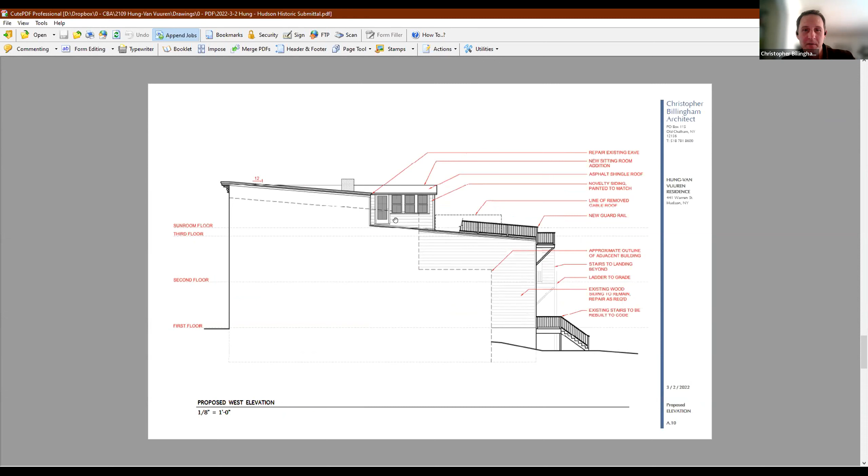The pathway would require new guardrails for fall protection. We would like to propose a vertical cable style railing system, as it would kind of vanish away and be very unobtrusive. However, we're open to a cedar baluster that would be painted as an alternative as well. The decking for the pathway would be a composite decking board.

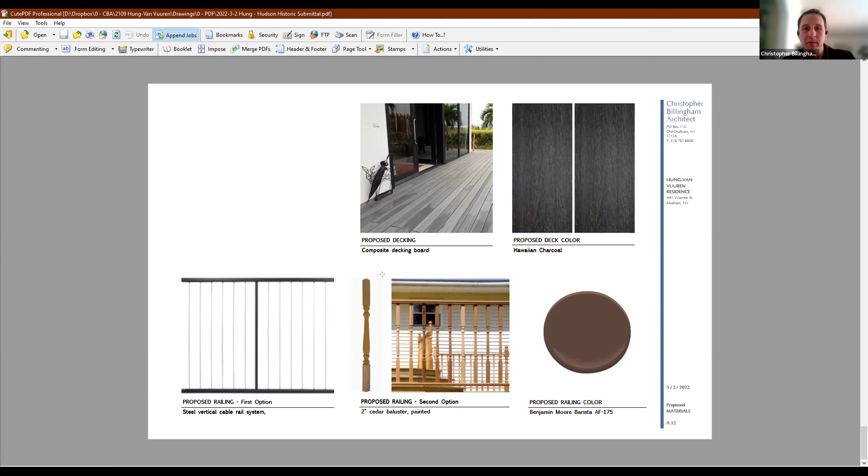Additionally, there's some repairs to the existing novelty siding on the lower portion of the rear part of the house, which would be replaced in kind with new novelty, again painted with a matching gray. And up on the third floor space we would remove the asphalt shingles and replace with, again, the pine novelty to be painted the same color as well. Just looking through my notes here.

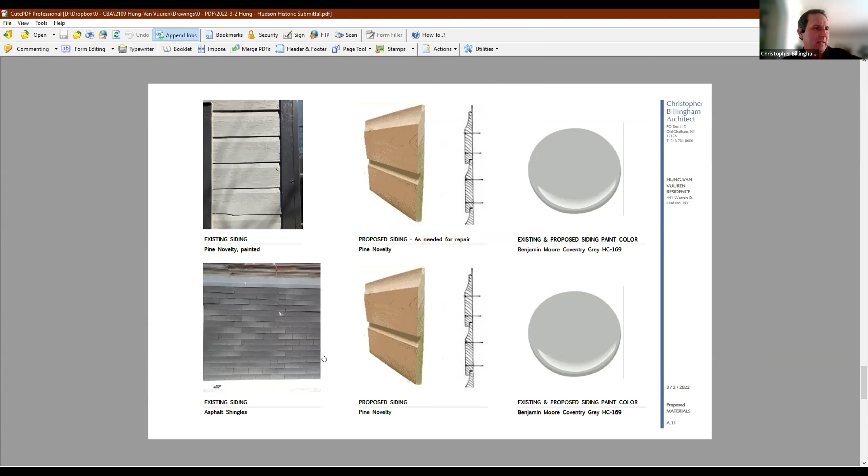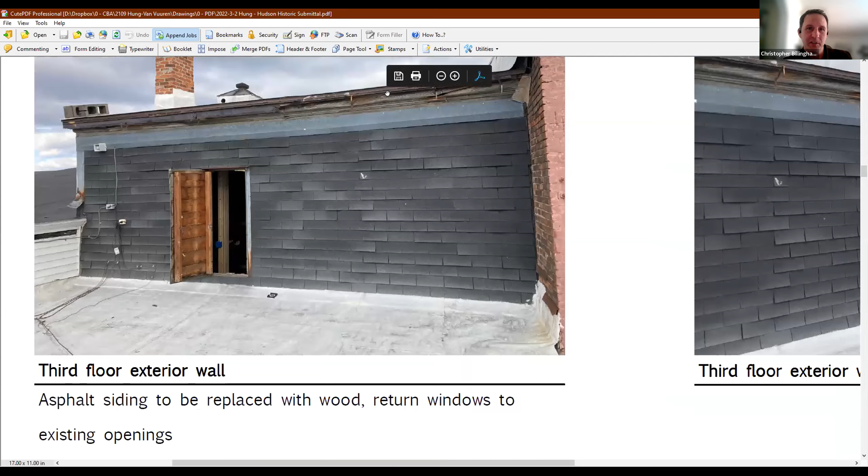Oh, and there's also this location, the eave of the existing portion up here. You can see it's kind of falling apart a bit. We propose replacing this with a new wood eave of the same profile. I think that covers our proposed alterations.

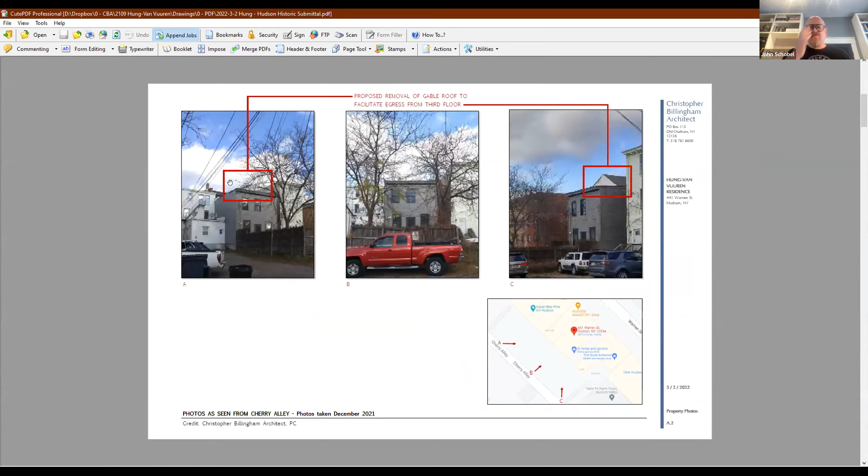Could I see the view of a photograph of the rear again? The facade as it exists? The photograph or the elevation? First, the photograph, like what does it look like today? Is this what you're looking for? Yeah, that's helpful. That's the small gable piece there. And then can we see the elevation again.

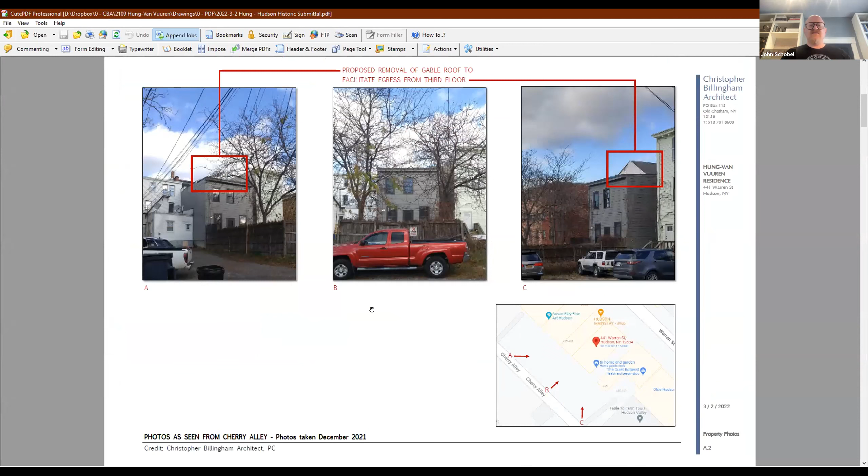The elevation just strikes me as, I mean, maybe unavoidable, but it looks extremely busy, right? It goes from something very simple to something very busy. That staircase going across in front of a window strikes me as such, and that little perched office area on the top also looks like it's just dropped there. And I don't mean this in terms of just my aesthetic opinion. It's a drastic transformation from what is to what is proposed.

Well, I think part of the problem is that being an elevation, you're not really getting the depth of where elements are placed in their plane. Keeping this photo in mind, the new sitting space does not come out this far at all. It's really way back here, the furthest extent of it. So I think that's one thing to keep in mind. Elevations are kind of deceiving.

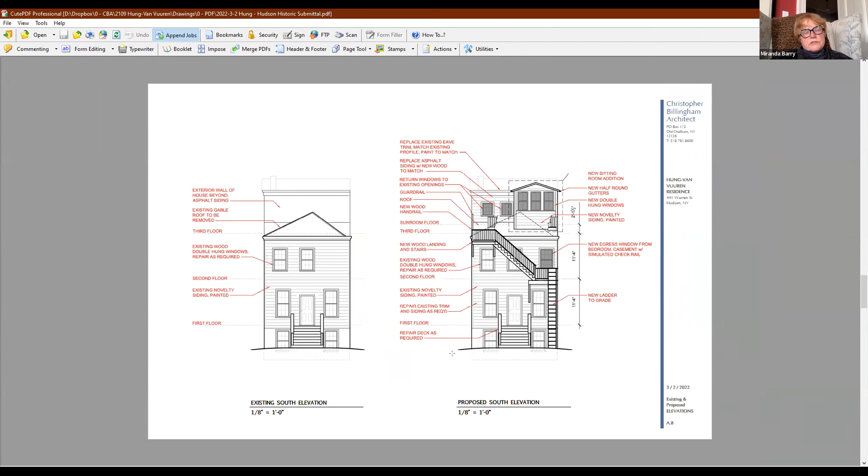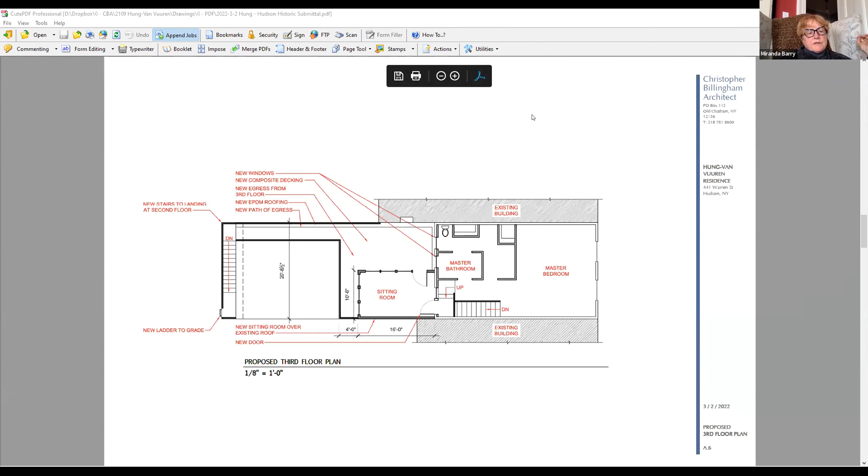How many feet is it from the new sitting area extension to the edge of the roof? How far back is that? From this location to the edge of the roof? Yes, from the addition that you're adding on. That is roughly 25.5 feet. Right, so it's very far from the edge. Yes. I don't think it would be visible from the street. I do agree with John that it's awfully busy, those stairs, but I don't know what alternative you have. You need a fire exit.

Well, I wonder, I don't know if Craig is still available or not, but if this is a required means of egress and that solution is a ladder, I don't know that that's even permitted, is it? Well, I assume it wouldn't have gotten to us if Craig hadn't approved that. Chip, he's reviewed all these. Yeah, it's an approved means of egress as a secondary.

There's a lot of things going on in here that they have to do to meet the code requirements for fire egress systems when you're changing the use of a building like this. So that's definitely required. And after doing a site visit, I was there yesterday looking at the back of this, that is actually their only alternative. There's no other option, and they even have to sprinkler the third floor. So it's a task.

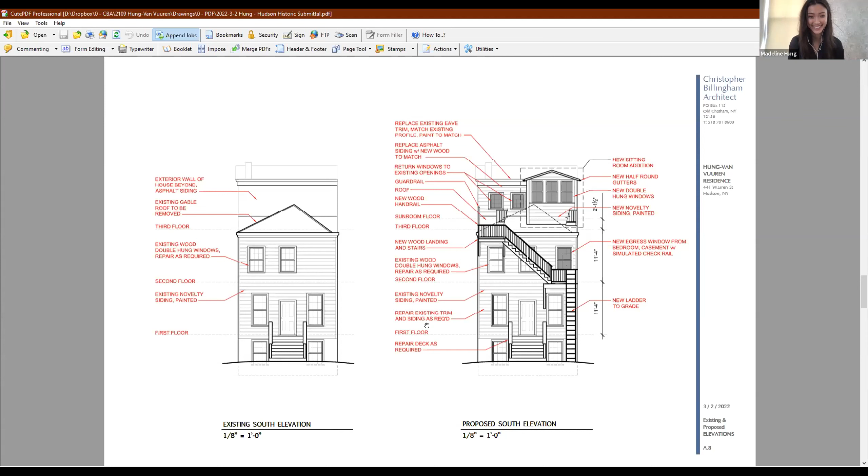Couple items. We've got a public hearing on the Depot District in 2 weeks. The probability is John has kindly agreed to chair that meeting. I've surgery a couple days before and may or may not be mobile. Our next meeting will be an in-person meeting, as we discussed up front. And Victoria explained that that's through New York State. Is it definite? According to the city, it is definite. Okay.

Wait, that's gotta be in person? The commission is required to go to in person. When is that? Well, the governor. 25th. Sorry, Victoria. I was gonna say, as far as I know, we don't know if the governor was gonna extend it or not, but you're welcome to meet in person regardless. I only know what the city told me. I did speak to the mayor's office. I talked to Tracy and the folks who manage everything downstairs, and that's what I was told. Okay, so we'll plan on meeting in person.

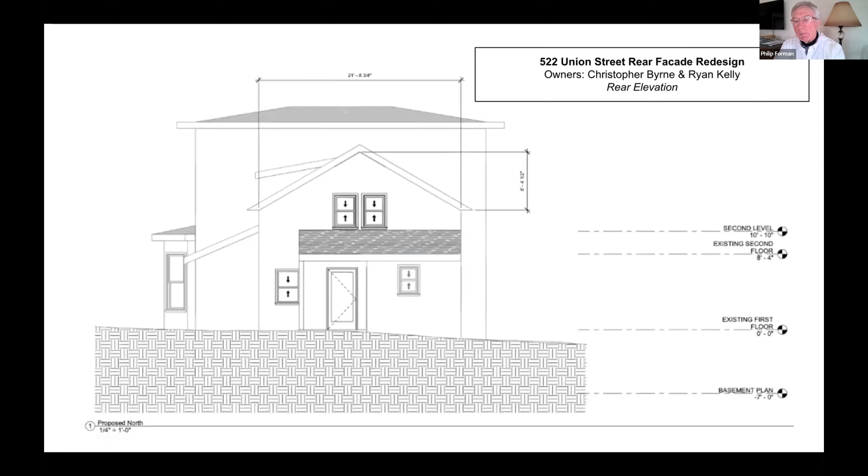Certified local government - I'll keep you guys just for one more minute. I'm sorry Jeremy, I couldn't hook up with the proposed times. I did send you a note. Yep, I was gonna see how much time I have, I have a hard stop at 1, but if you, me and Paul want to hang on till then, we can certainly chat about it. I think we can. If that's it, I have no additional further business for the commission.

Folks, Mr. Chairman, my hand is raised. Ronald, it's a pleasure, what do you got? Okay, just very quickly on this question of the end of virtual meetings, I think the commission should look very closely at the possibility of doing so-called hybrid meetings, namely virtual and in-person attendance. And Ronald, I'm way ahead of you, I've already made a query to the city to see if we can do that.

Because for one thing, it'll help me tremendously, especially with this important public hearing coming up on the 25th. The city has this device called the OWL, which the council has been using, and I understood the council is going to continue using it regardless of what the governor does, to enable hybrid meetings. So thank you very much on that.